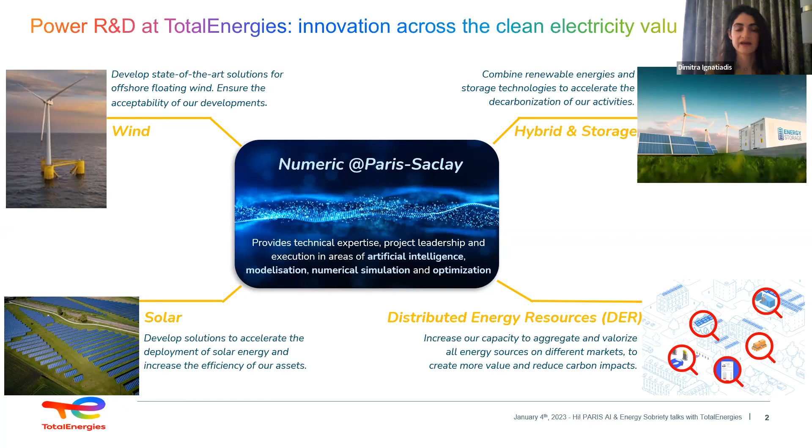And this team aims to provide technical expertise, project leadership, and execution in those areas to support the innovation across the clean electricity value chain and accelerate those activities in the company. So now let's start with a bit of context. So my presentation will go this way. First, I will introduce you to the context. Then we'll go through two business case studies, and then I will conclude.

So the electricity grid is currently undergoing a significant transformation because of the decarbonization of the energy value chain. Two things are transforming: the electricity supply, the production, and the electricity demand, which is the consumption. On the electricity production side, there is more and more penetration of renewable energies production, which is good, but because renewables are intermittent, they depend on weather conditions, this is increasing the volatility of electricity production.

And the electricity demand also has some transformation because there is more and more electricity demand because electric vehicles are developing. There are also other electricity uses that appear and that increase, like electric heating devices, air conditioners, and more. And this increases the variability and the uncertainty of load shapes. At all times, the electricity grid needs to match electricity supply to demand. This is called grid balancing. And this task is becoming increasingly challenging because of this significant transformation.

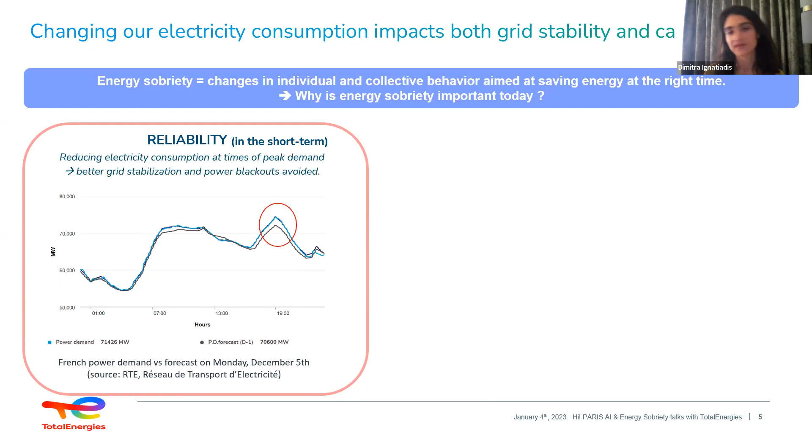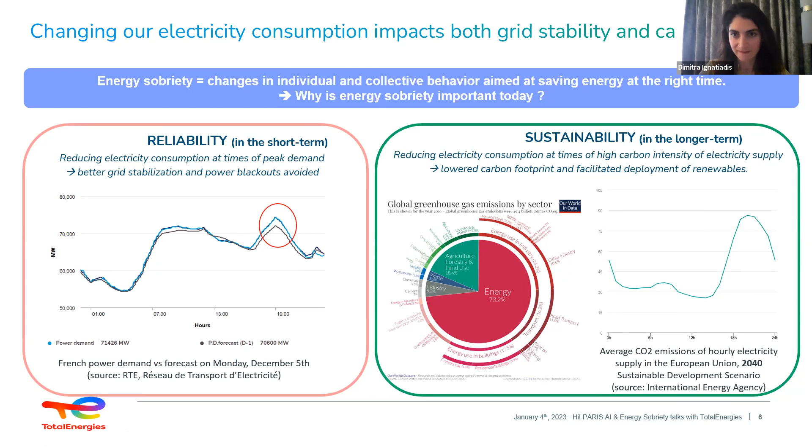So if we reduce the electricity consumption at times of high carbon intensity of electricity supply, then we have lower carbon footprint, and we can facilitate the deployment of renewables. And this will be increasingly important in the future. So this is in a 2040 sustainable development scenario. This will be increasingly important as the renewables will develop more and more. So in this context, we need more and more flexibility to reduce or shift our electricity consumption when needed.

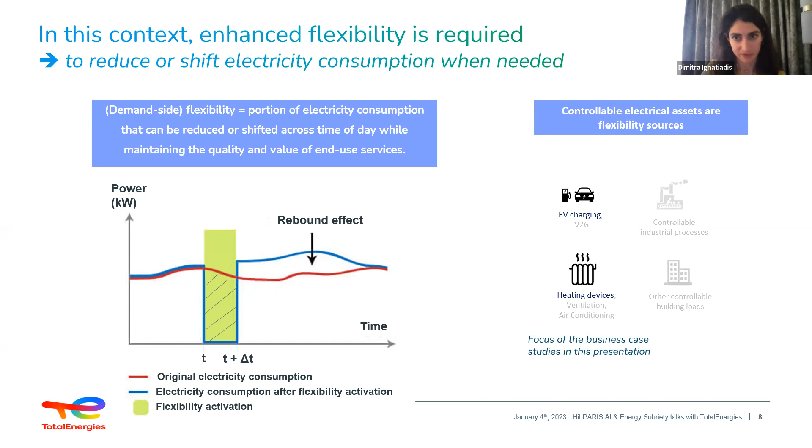Where can flexibility sources be found? For a long time, the grid had contracts directly with industrial plants, for example, in order to reduce their electricity use at times of peak demand when needed. But now, as there are more and more controllable electrical assets in our homes, or that we use, like EV chargers, the grid can also leverage the power reduction from those electrical assets from individual users. So in this presentation, I'm going to focus on this kind of controllable electrical assets, EV charging and heating devices, which are assets used by individual users.

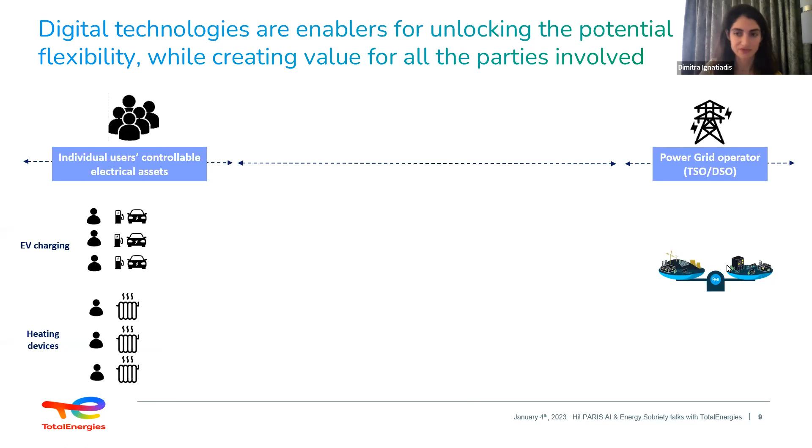So we have on one side individual users and their controllable electrical assets, EV charging and heating devices in our case. So these can be flexibility providers by reducing or shifting their electricity consumption. On the other side, you have the power grid operator that needs to balance electricity supply to electricity demand and reduce the carbon footprint of electricity supply.

To unlock the potential of flexibility, there is a need of an intermediary actor, which is called the flexibility aggregator. That can be TotalEnergies, that can be some other company, of course. And so this flexibility aggregator will leverage different digital technologies to make that possible. So IoT and assets management to manage all the assets individually. It will require to connect to databases, data science engines, dashboarding, etc.

This flexibility aggregator has contracts with the users and with the grid, to tell the grid, okay, we can provide that much flexibility on this day, and with the users to agree on the terms. And so this not only can reduce or shift the electricity use, it's also creating value for all the parties involved.

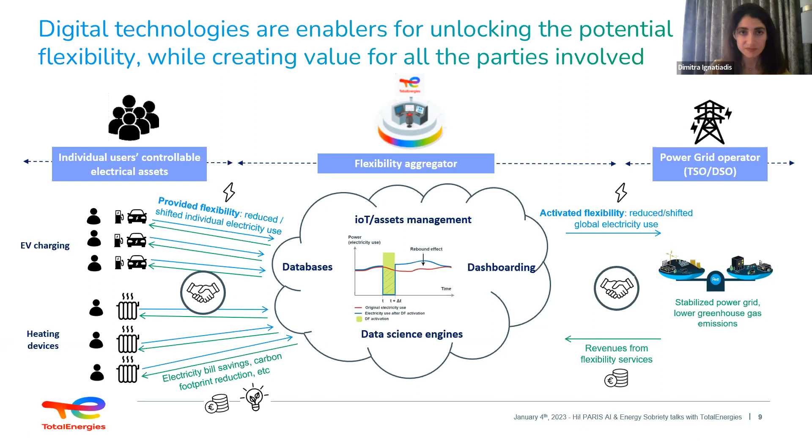So for the individual users, it can lower their electricity bills and their carbon footprint, and all this in an automated way. For the flexibility aggregator, it can give them revenue from these flexibility services. And for the grid, it provides a way to stabilize the power grid and to lower the greenhouse gas emissions, because they won't need to produce more electricity from fossil fuels in case of peak, for example. So this creates value for all the parties involved.

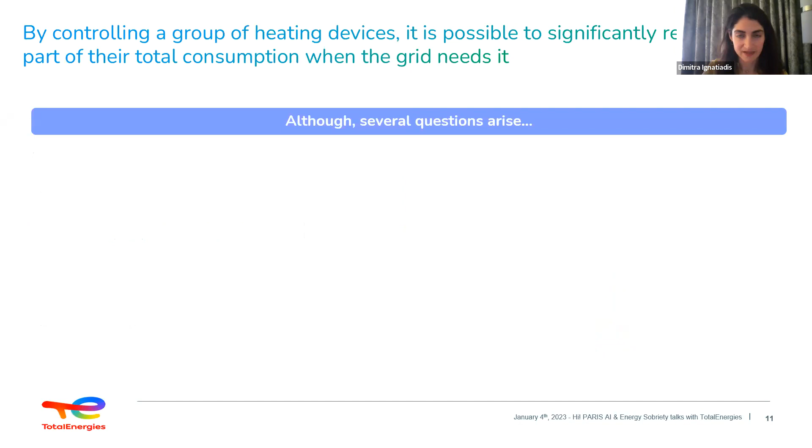So now we are going to deep dive more into controllable home heating and then controllable EV charging through two business case studies based on data. So theoretically, by controlling a group of heating devices, it's possible to significantly reduce or shift part of their total consumption when the grid needs it. Although several questions arise.

How much flexibility can be achieved with a given number of heating devices? That must be modeled. How does this flexibility vary given the outdoor temperature and the moment of the day? Will individual users feel a significant drop in their indoor temperature when their heating devices are switched off? And finally, how long do we have to wait after a flexibility activation to schedule another one on the same heating device? Because you need to wait for the required time for the room to come back to the set point temperature.

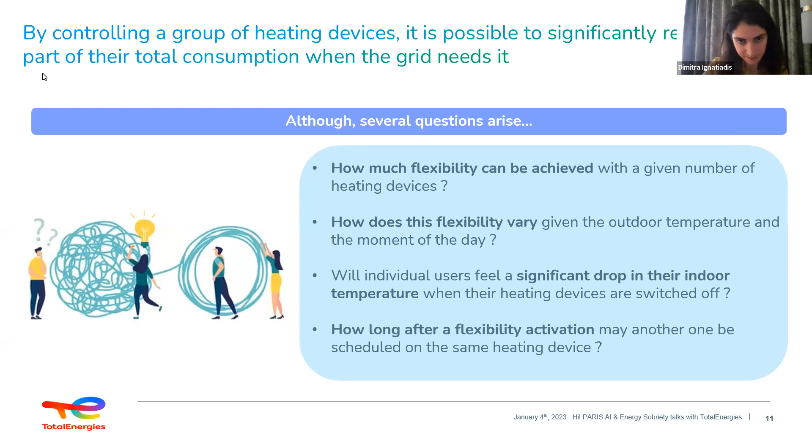So we did a data-driven study, whose objective was to model how much consumption can be reduced or shifted at each time slot of a day from a group of heating devices. For this study, we had 147 households that had in total almost 700 heating devices spread out in France. And we had for each heating device its consumption time series, the indoor temperature of the room, and the set point temperature set by the customer through the days, between 2018 and 2021, so for almost 3 years. All of those heating devices represented 900 kilowatts of installed power.

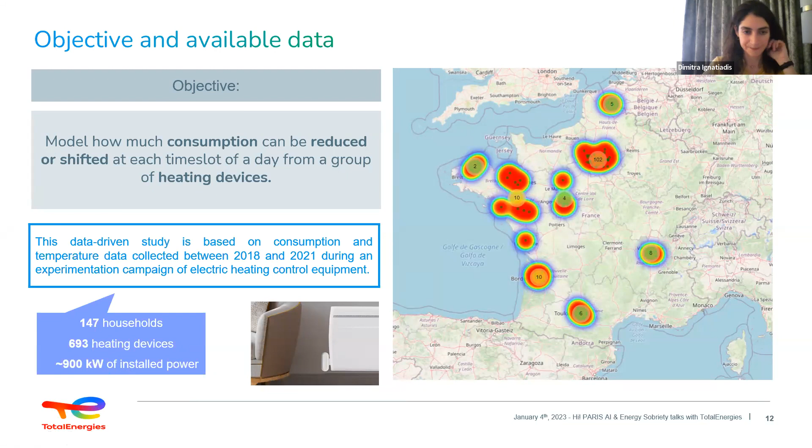So we're going to see that not all of the installed power of a group of heating devices can be reduced or shifted, because first, the heating devices are not continuously heating up. We plotted here the share of heating devices that are heating up at the same time over the winter period from October to April. And this share varies from 0 to 35%. So it's not so much. Even on the colder days, the average is about 20%, and the average over the winter period is 10%. So it's really not so much compared to what we could expect.

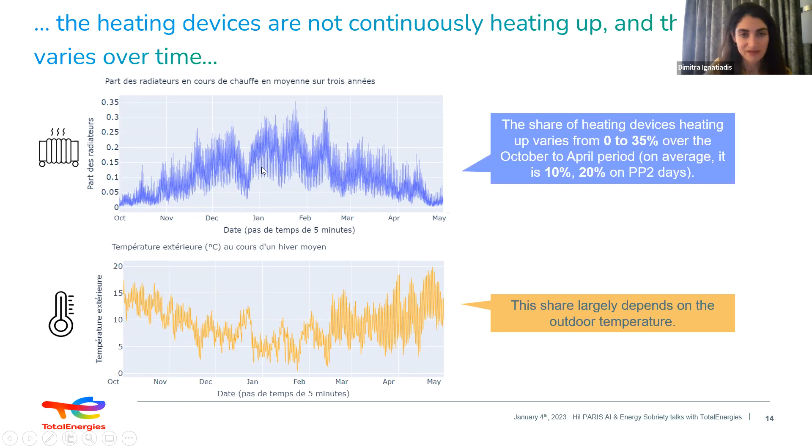And also, this share is inversely correlated with the outdoor temperature. So the colder it is, the more heating devices are heating at the same time, which is logical. Second reason, the activation duration of flexibility is typically 30 minutes. But a heating device is not necessarily heating up for 30 minutes. It may be heating up for less. So that's a second constraint. And on this graph, we can see that actually 35% of heating activations last 30 minutes or more.

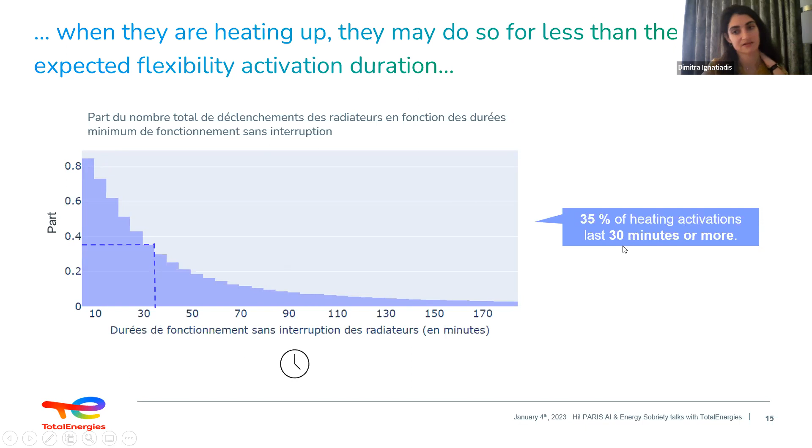And third reason, this is more individual user constraints. When we switch off a heating device, we don't want to deviate too much from the user's set point temperature, because when it is switched off, the indoor temperature of the room will decrease, but we cannot let it decrease too much. How much is acceptable? For example, 0.5 degrees is maybe acceptable. More, maybe not. So for that, we need to learn from the data how fast the indoor temperature decreases in each home and each room of the individual users.

And so here we plotted the distribution of heat losses in 1 hour among all the users' rooms. Some of them have very little heat losses, 0.16 degrees in 1 hour. It's very, very acceptable. The house must be well insulated, and some others have really higher heat losses. But on average, it's 0.5 degrees Celsius for an indoor and outdoor temperature difference of 15 degrees.

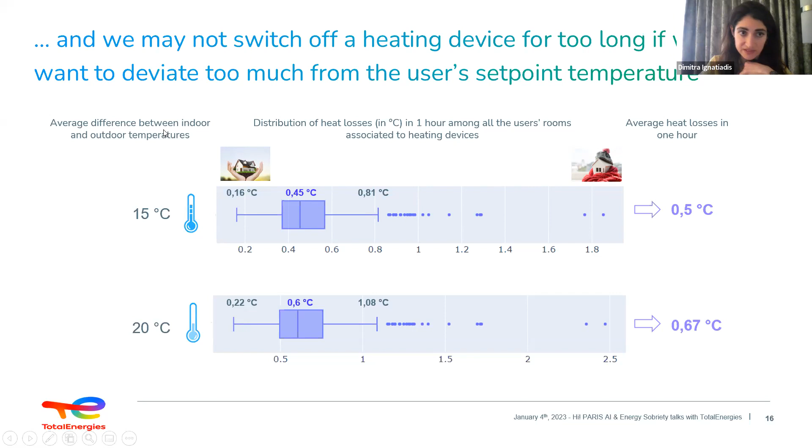So all of these constraints can be found on the consumption and heating profile of a typical individual user. Here we'll take an example of an apartment with 2 occupants and a heating device located in the living room. For this heating device, there are 0.68 degrees of loss in 1 hour. So it's situated here, so it's more than the average.

And let's look at the power consumption across a day, and also at the temperatures, so the set point temperature in green, and the indoor temperature that is following the set point and depending on the activation and deactivation of the heating device. So we can find all of the constraints that we listed before. There are periods where there is no heating, typically during the night. There are periods where heating lasts less than 30 minutes. And when the heating device is switched off, like here, the temperature is decreasing at some rate.

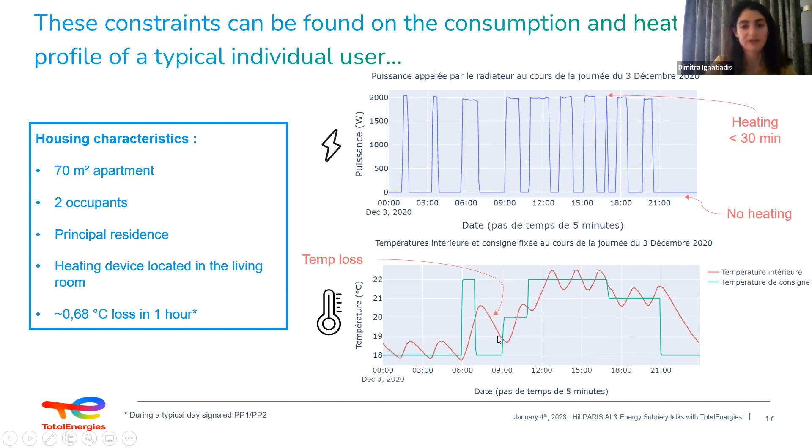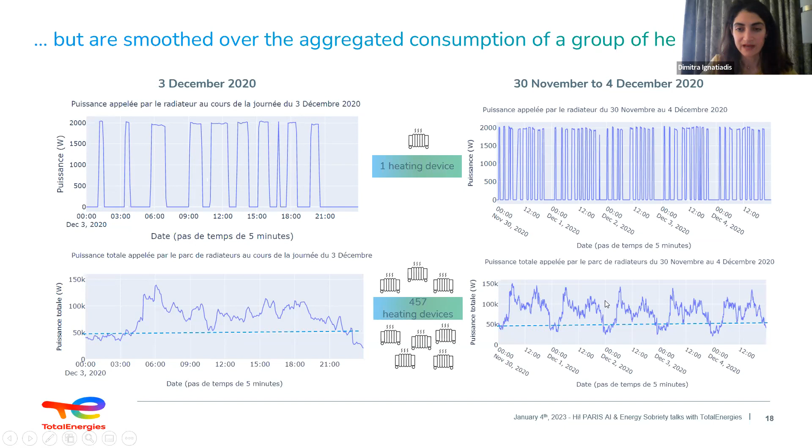So when looking at the power consumption of one individual heating device, there is high variability. It's on and off, but the power consumption is smoothed over the aggregated consumption of a group of heating devices, like shown here. When we are aggregating 457 heating devices, we are pretty sure that at all times of the day, you at least have a minimum power consumption. And you actually can also have some patterns, daily patterns that appear.

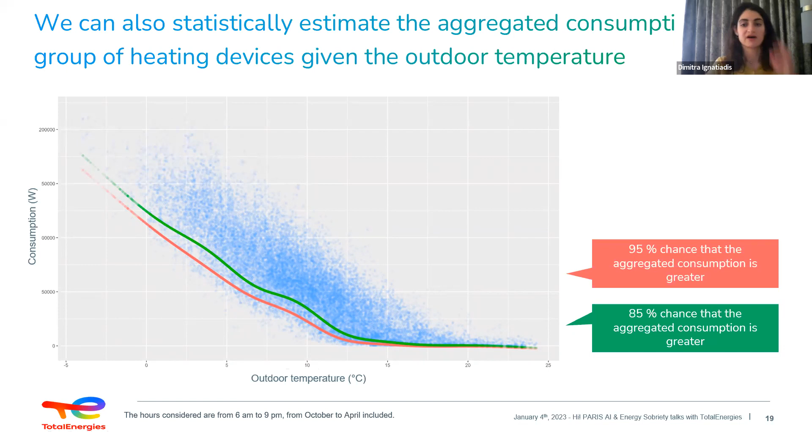Also, what we see is that this aggregated power consumption is really correlated to the outdoor temperature. And that enables us to statistically estimate the aggregated consumption given the outdoor temperature. For example, this red line means that there is 95% chance that the aggregated consumption is greater than these values. And the green one means that 85% chance that the aggregated consumption is greater.

So flexibility depends on many things: on the number of heating devices considered, on the time in the day, on outdoor temperatures, on the activation duration, and on the user constraints. So user constraints would be how much we can deviate from the set point temperature. And all of this can be modeled. So we can model the flexibility across the day as a function of all of these variables. And so that's what we did.

So we made a tool where you can input a number of heating devices in the portfolio of your choice. Instead of outdoor temperatures, we created types of days based on the outdoor temperatures, like very cold, cold, etc. Extreme is a reference type of day, like a very cold one with given outdoor temperatures. Flexibility activation durations, 30 or 60 minutes. Maximum deviation to the set point temperature varying from 0.5 to 3 degrees.

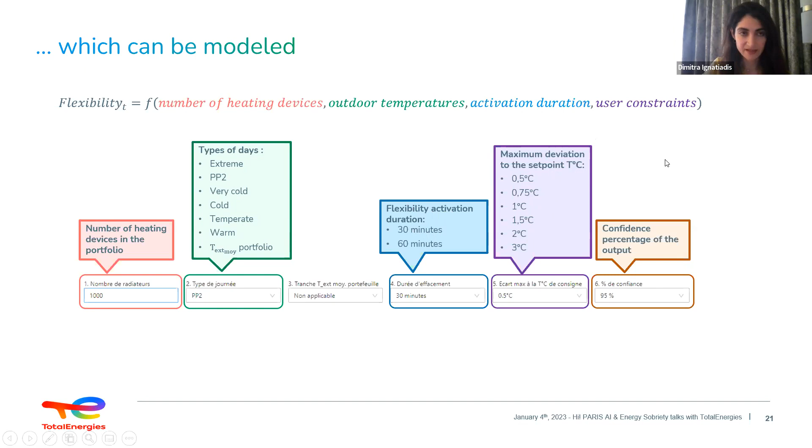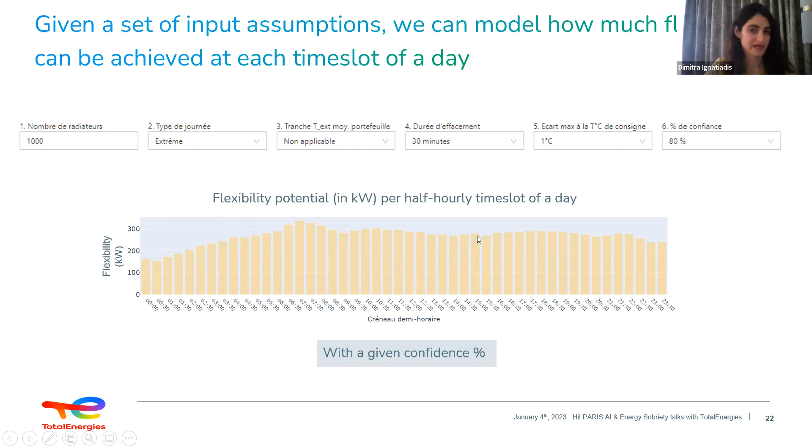And so given a set of input assumptions, we can model how much flexibility can be achieved at each time slot of a day. So that's what we see here. For each half-hourly time slot, we can model that we can have this much flexibility if we activate at this time slot. And this can be given with a given confidence percentage. So that means, in this case, we are 80% sure that the value will be at least this one. But we can also give it with a confidence interval, like the value can vary from this value to this maximum value.

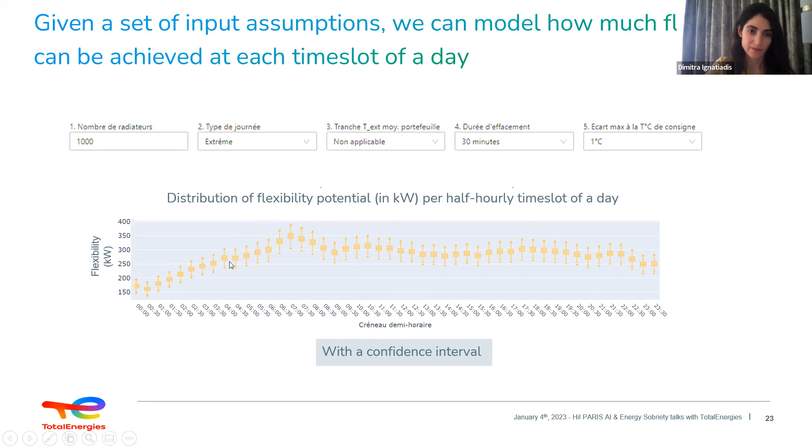The limit of this approach is that we can model the flexibility on a particular time slot, but not taking into account the fact that another flexibility activation could have occurred before. And as we saw in the beginning, if we activate flexibility, there is most likely a rebound effect after, which impacts the consumption and the flexibility potential later in the day.

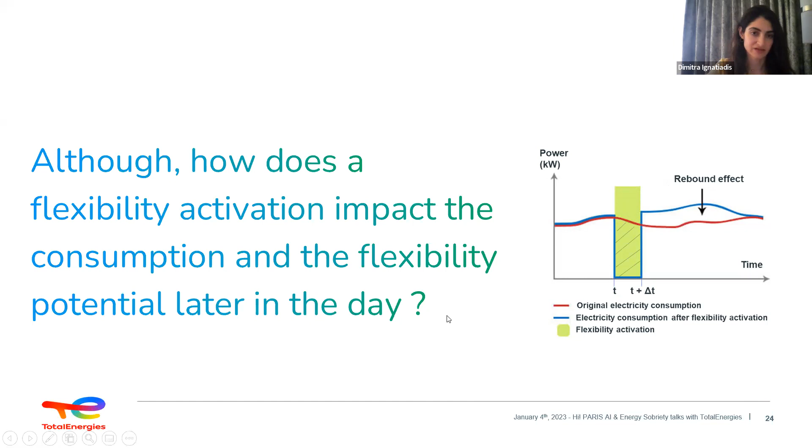So for that we need to use a different modeling approach, which takes as an input the flexibility activation time slots. In this example, we took 3 time slots, 7 a.m., noon, and 7 p.m. And then the indoor temperature variation and power variation need to be modeled for these flexibility activations. And here we can see that the rebound effect is well modeled. Like there is a difference between the consumption without flexibility and the consumption with flexibility activations.

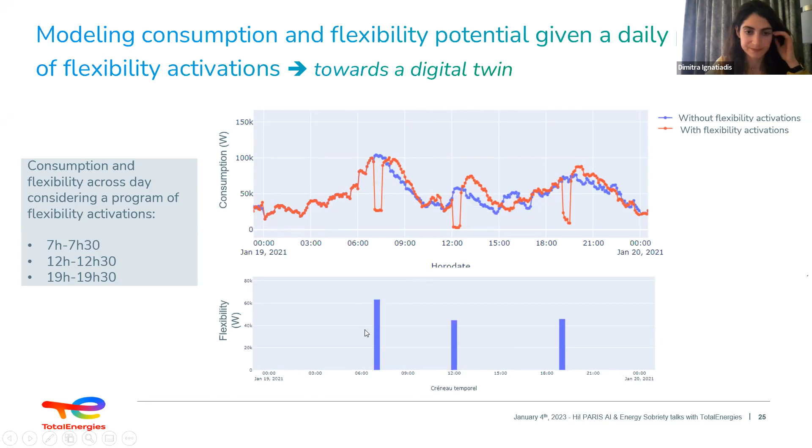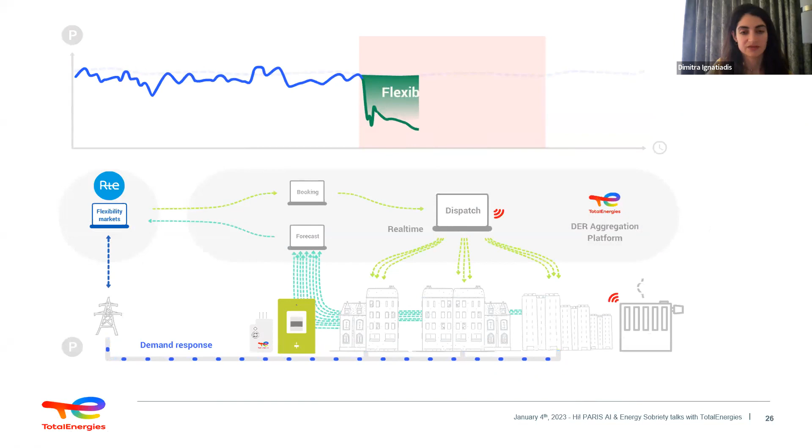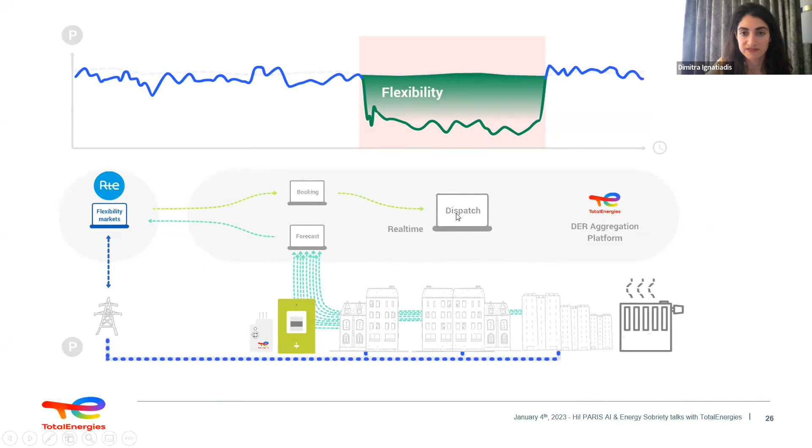So to wrap up on this first business use case, to unlock the potential of flexibility from heating devices, we need to anticipate and to be able to model the flexibility potential and the load, but also be able to dispatch in real time. So we need to anticipate in order to give to the grid operator how much flexibility we can provide, but also to dispatch in real time on the flexibility day to really provide this flexibility.

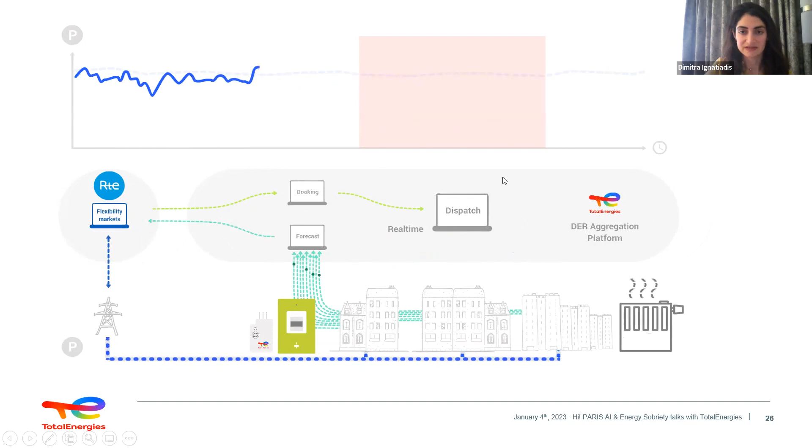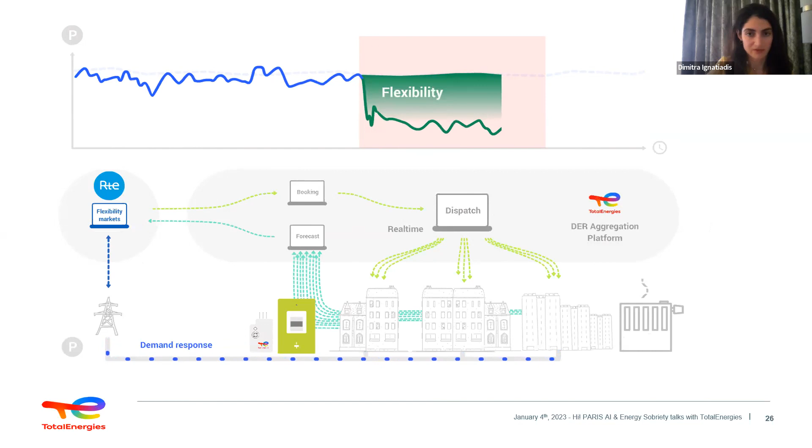And so for the modeling and forecasting part, AI and data science are the skills needed. But for the other parts, like the dispatch and also the connection to the assets, there are other skills that need to be involved, like optimization and back and front development.

So during this charging session, the charging occurs just at the beginning, and then there is a large portion of the time that is an inactivity time of charging. It's called idle time. And so basically the idea of flexibility in the case of EV charging is that we can shift the charge later in the session without impacting the charge of the EV and the time the user needs to leave. So the difference between the time required to charge at maximum power and the time an EV is parked gives us flexibility.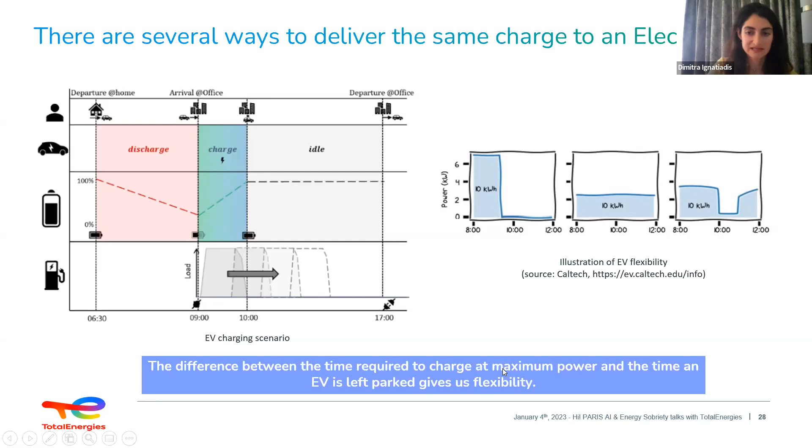So how to coordinate EV charging and unlock the potential of flexibility? I'm going to propose to you three steps to do that. First, analysis of EV charging behavior, then anticipation of EV charging load, and third, establishing a control strategy to coordinate EV charging.

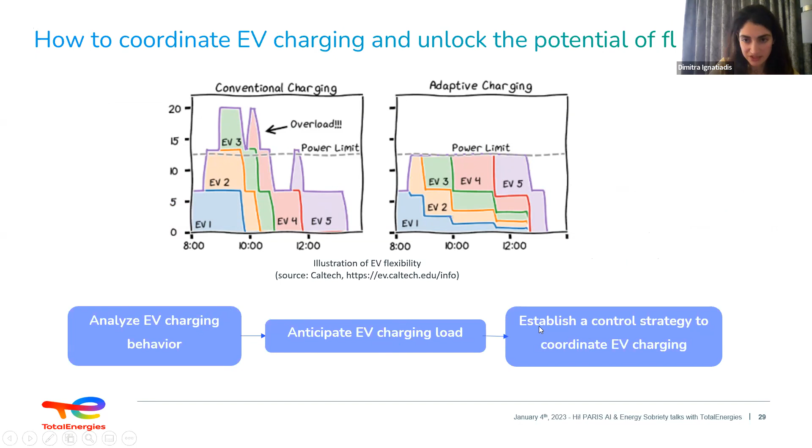First, let's have an overview of the EV charging data. Typically, there are some IDs: ID of the charging session, ID of the charging point, that's called an EVSE. Then we have at least two date times, the start date of the session and the stop date. Then charge information: total consumption of the session, max power of the charging point, and max power that occurred during the session, and the locations of the charging point.

EV chargers can be located at different places, and that impacts a lot the charging patterns. For example, they can be located at home. They can be located in the street, so that's public charging, and they can be located at workplaces. And so in the following slides, we are going to focus more on public and workplace charging, which are both really different in terms of usage, as you're going to see.

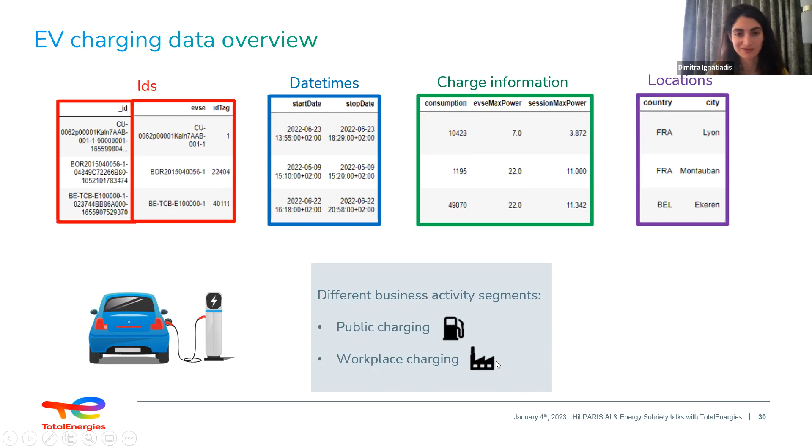So first, analysis of EV charging behavior. Here, it's the case of public EV charging. And we want to see when the EV charging demand is high. We plot all the daily load curves on the same graph to see at which hours the demand is high. The daily load curves are usually stable, as we can see here. They follow the same trends. And there are two main peaks, one at midday and one evening peak. The main one is the evening, after 8 p.m.

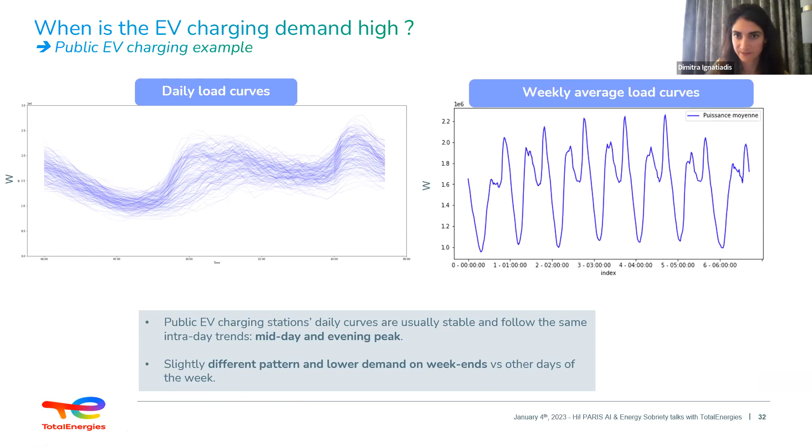And when we plot the weekly average load curves, we see, so this one is Sunday and this one is Saturday. During the week, the pattern looks pretty much the same. And on the weekend, it's a bit different. So there is a weekday-weekend pattern for public EV charging, but not that much different.

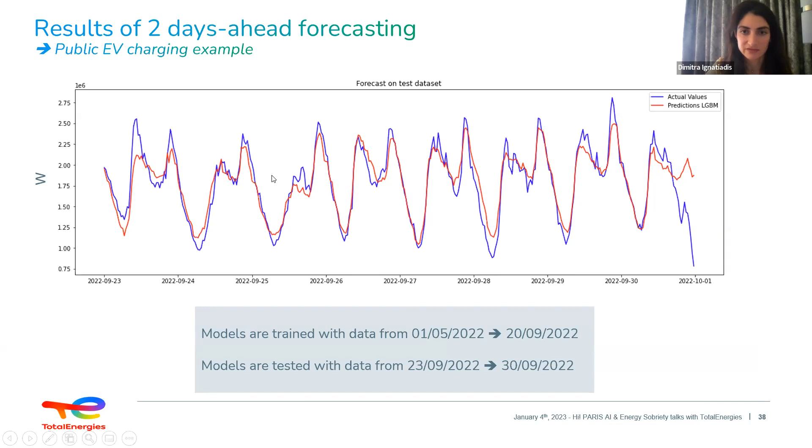So to provide daily forecasts, you need to make an automated forecasting pipeline, because every day you get new data. You need to pre-process and do the feature engineering, and so we used a tool called Databricks to make this automated forecasting pipeline possible. With this tool we can train several models and select automatically the model that works best, and then this model can be used for the daily forecasts without being retrained necessarily every day. And when the accuracy monitoring tells us that the accuracy decreases, the model can be retrained and more features can be built. But this is a way to do it in an automated way in production.

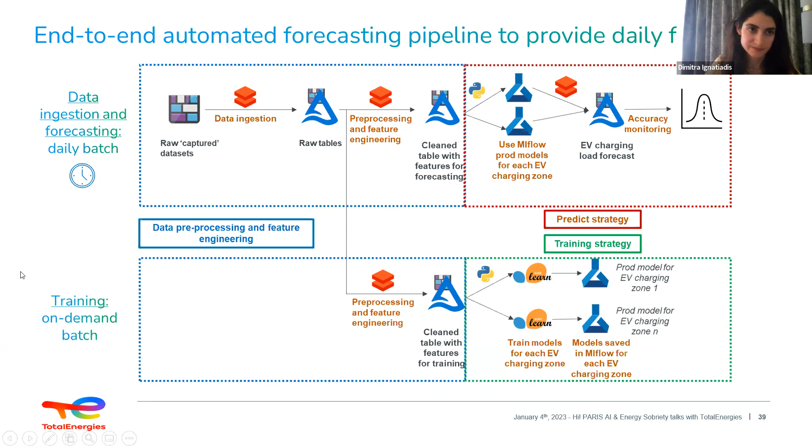Lastly, establish a control strategy to coordinate EV charging. In this use case, we wanted to minimize the carbon impact by coordinating EV charging. So we had access to a forecast of carbon intensity of electricity supply, which is this curve here. We had access to the solar generation in red here, and the power, the EV charging use. And so, by considering users' departure hours, charging time, solar production forecast, and this CO2 intensity of electricity supply, we saw that EV charging coordination can reduce average hourly carbon emissions. Like you see in this graph, if we shift this use later in the day, we can make it coincide with solar production, which reduces the hourly carbon emissions by 20% in this case study.

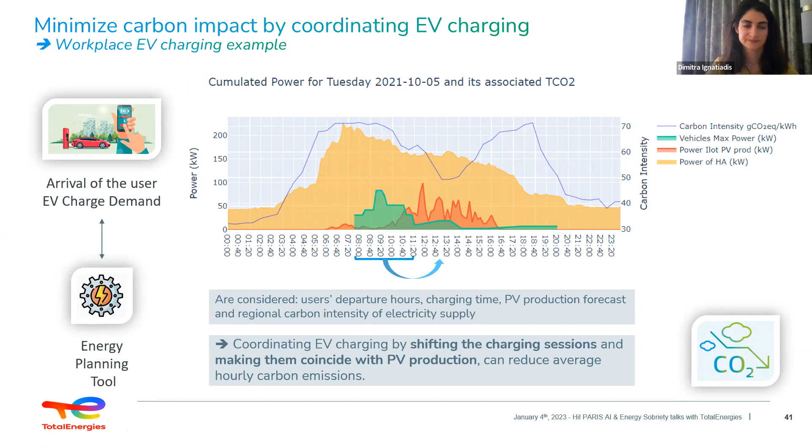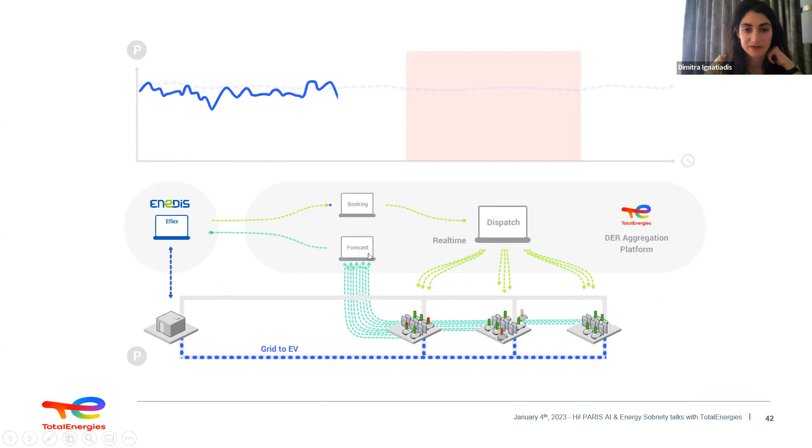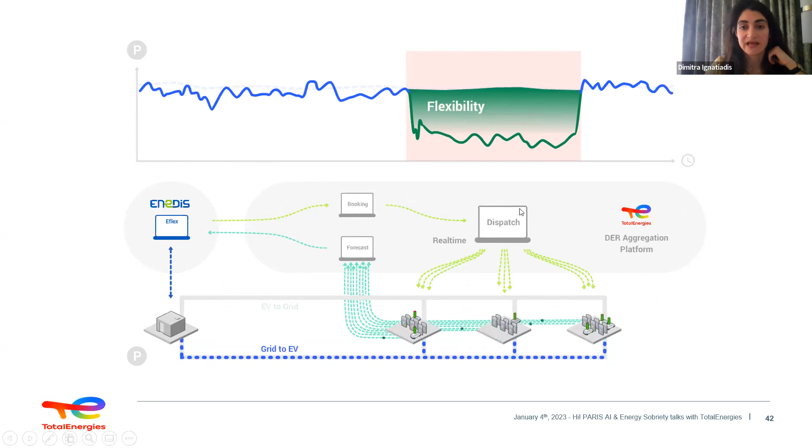So to wrap up also on this business use case, same principle: to unlock the potential of flexibility for EV charging, we need to well anticipate the load and the flexibility potential, and also be able to dispatch in real time the EV charging.

So now let's conclude. A few key takeaways. So the rapid digitalization of our homes and electricity uses are an opportunity to reduce or shift electricity demand from peak and carbon intensive hours of the day, and reward the individual users for their flexibility. There's more and more connected appliances, such as heating devices and EVs, that can be aggregated together and their electricity use controlled remotely and in an automated way. And this can be made possible by actors like flexibility aggregators that can leverage AI and digital technologies to learn individual users' behavior, estimate flexibility potential, perform forecasts, dispatch in real time. So as you saw, there are many applications of AI and digital technologies for energy sobriety.